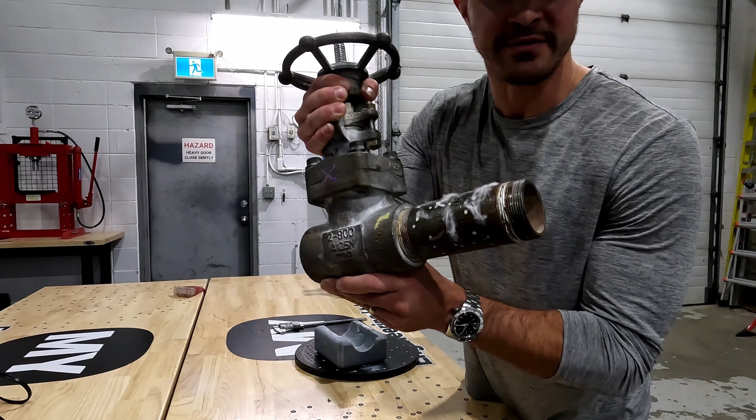So what I've done is, using this valve, I've scanned it in the clean condition, and also scanned it with some insulation residue on it. I'm going to show you how that affects the measurements when we bring it into the computer. You can see on this valve that there's some fuzz left on here, some insulation residue.

Now, when you're measuring by hand using calipers, that might not matter so much, as with the calipers you can compress that insulation down to the bare pipe and it's going to have a minimal impact on your accuracy. But when you scan and we bring it into the computer, we can't really tell the difference between bare pipe and where there might be a little bit of fuzz left over.

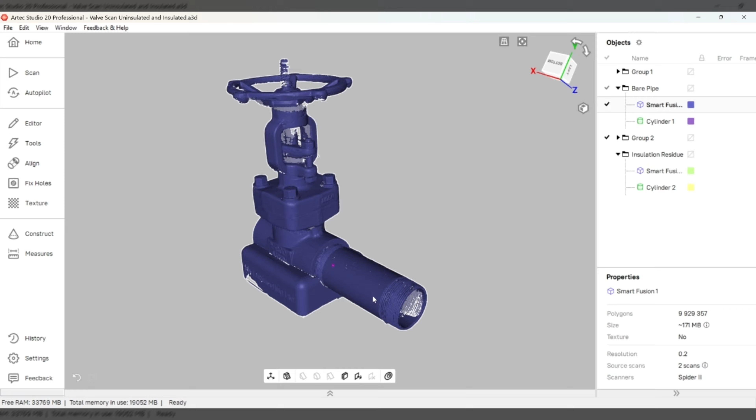So I'm not going to show the scanning, but I am going to show you what this looks like when we bring it into the computer. So here's the valve, the first scan that I took with the pipe being clear. There's some marring on it, but there's no insulation on here.

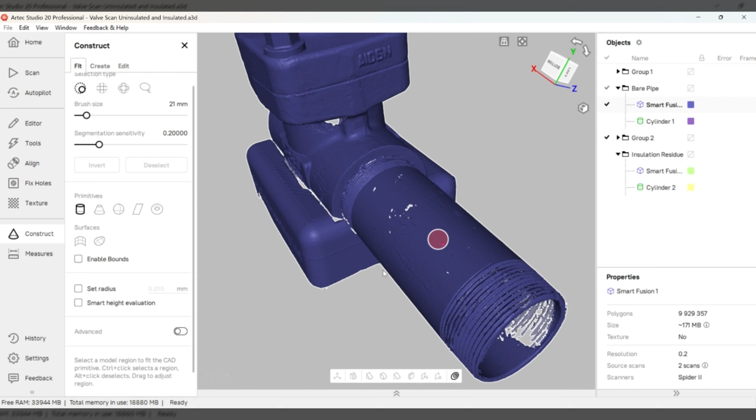So what I'm going to do is fit a cylinder to this. This is a fairly standard process that we use when we're extracting measurements. So I'm going to click a spot here, and what this is doing is finding all of the points that it believes to be a part of this cylinder. So here we go.

This is what it looks like. So it's picked all the triangles on here that it believes are part of the cylinder. It's actually ignored a bunch of the marring, which is nice.

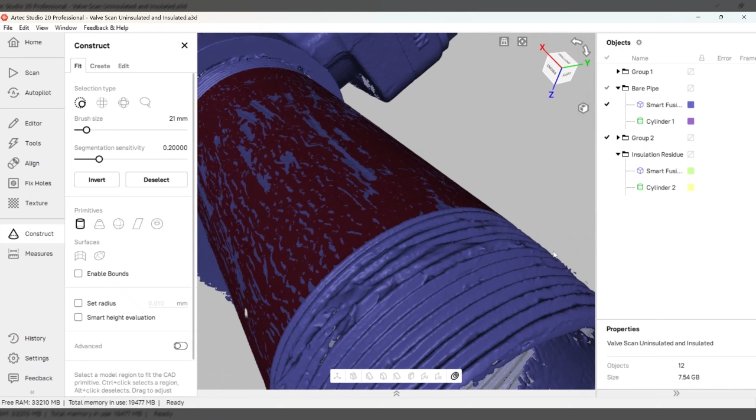So what I do is I inspect this to make sure that this is in fact all the data that I want to use when I am taking my measurements. So I think that looks pretty good. So I'm going to fit a cylinder to this, and then once this cylinder is fit, I'm going to check the measurements of it.

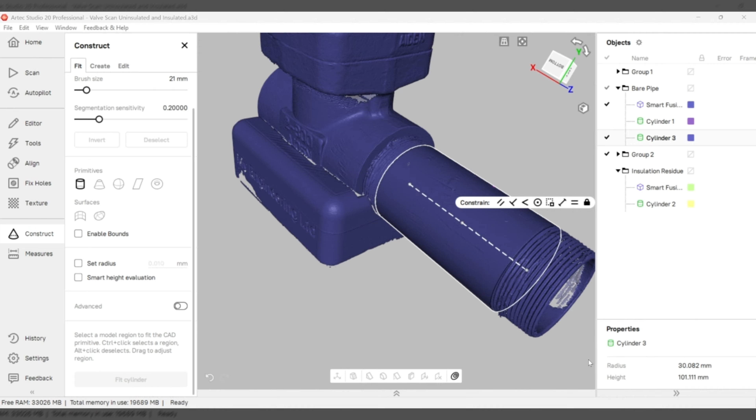Okay, so the cylinder's fit here. If I click on this cylinder, it's going to tell me the dimensions. So I got 30.082 millimeters on radius, so that works out to a diameter of 60.164 millimeters. Okay, that's how that works.

If I want to take a look at the accuracy of that cylinder, I can compare the actual cylinder itself that I created to the pipe to see how round the actual pipe is. In this case, it actually looks pretty good. There is some deviations, but that would probably be fine.

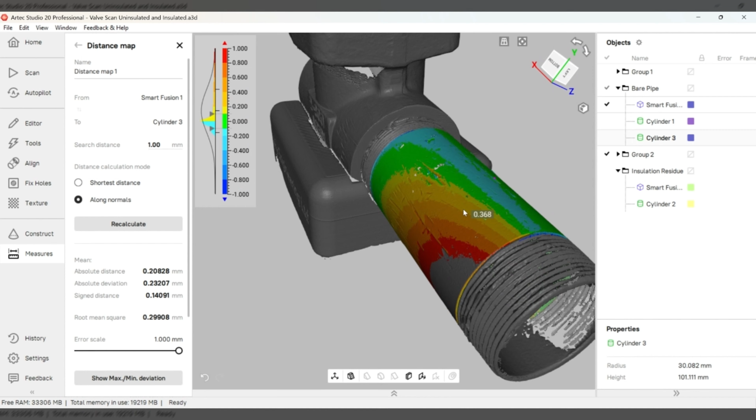If it was really out of round, then we would end up taking a cross section and using an oval or a custom profile. But for the purpose of this video, I'm not going to go too deep into that.

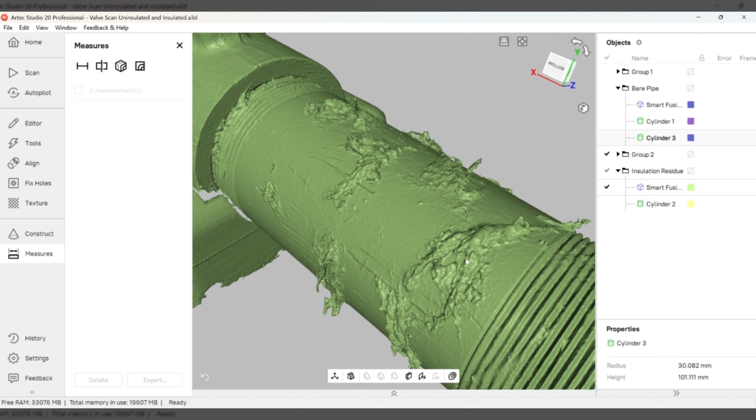So now I'm going to do the same process looking at the pipe with the insulation residue. So here's how the scan looks with the insulation residue. You can see that there's all these gobs of stuff on here. That's how it appears when it's in 3D scan format. So there might actually be some tiny little strings in here that I can't actually see. It just fuses that as a part of the pipe.

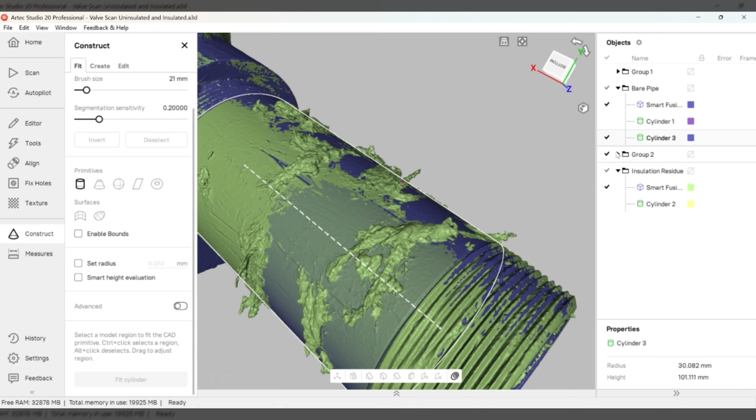So what I'm going to do is do that same thing where I create a cylinder and we'll check the results. I'll click a spot here, and you can see it's pretty intelligent.

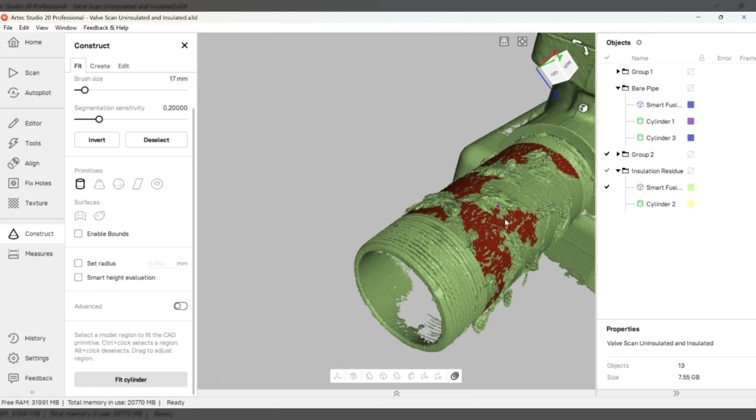It actually scrubbed out a whole bunch of this insulation, but it didn't grab the whole pipe. So I'm going to grab another section in there. That looks pretty good to me too. And then I'll go to the other side, select here. That looks pretty good. It's not really picking up any of that fuzz from what I can see. Maybe grab some in there.

So the more points that we grab in the spot that we're landing, the more accurate it's going to be, because it's going to use all that data to put a best fit cylinder on. So that looks pretty good to me. So I'm going to create a cylinder from that. And it measures 30.296 millimeters radially.

So to create a diameter from that, we've got 30.296 times 2. So 60.592. So here's my measurement with the insulation on, and here's my measurement with the insulation off. So the 60.164 would be the bare pipe, and the 60.592 is the measurement with the insulation.

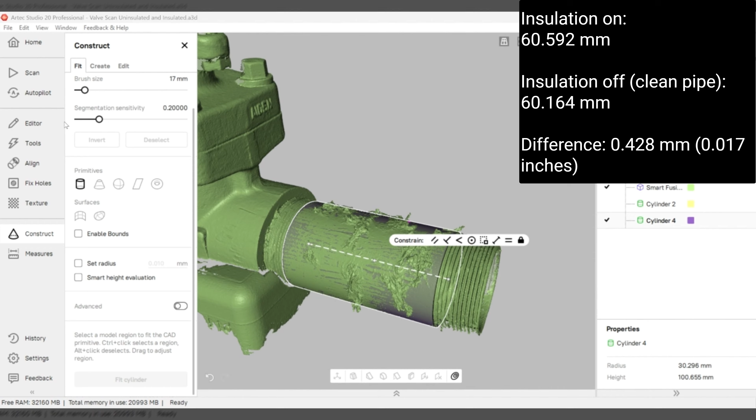So let's take a look at the difference of what that is. So if I subtract one from the other, we had a difference in measurements of 0.428 millimeters. So in inches, that is about 17 thou. So the one pipe measured 17 thou bigger than the other. Now, this is a pretty small pipe, so that might not be a huge issue.

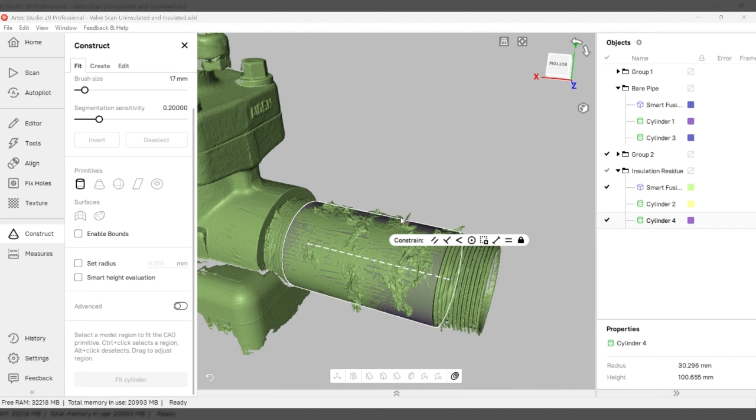Although there are some clients that we work with that like to fit their bores really tight using only 20 thou of diametrical clearance. So if that was the case and they left the insulation on, then it probably would fit loose and that would be an issue. So even though when I was constructing the cylinder, I looked pretty closely and was picking points that I thought were good pipe, there might have just been little traces of insulation left over that caused it to measure big.

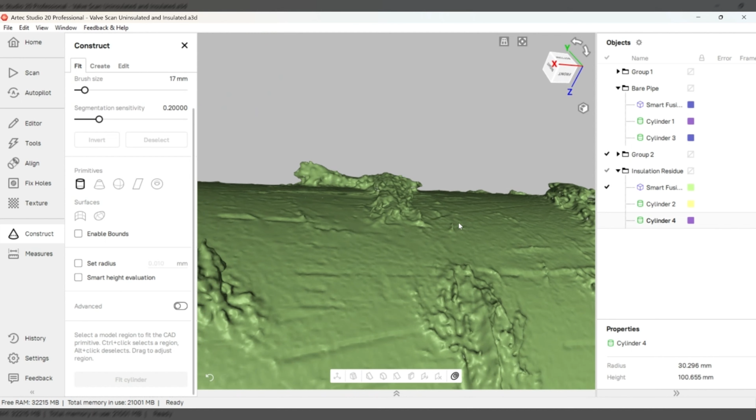So I did what I thought was a pretty good job, but again, there might have been some artifacts in there, which I can't really tell by looking at it on the screen, but there might have been some stuff in there. And actually, I guess there was, because it measured bigger, that ultimately affected the diameter of that pipe.

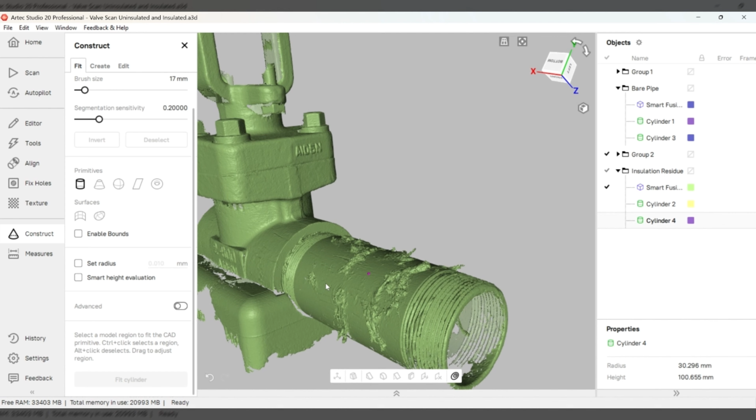So this is the kind of issue that scales when you get into bigger pipe sizes too. So if you've got a 30-inch pipe and you've got a little bit of residue on there, then it's probably going to grow just that much bigger and it could cause things to fit loose. So it is very important that you clean off the pipe that you're scanning, the object that you're scanning, right to bare metal if possible, before you take your scan so that we actually get accurate measurements and we can design the enclosure to fit properly.

So I hope that this helps clarify why it's so important to clean the pipe off when you're using a 3D scanner. 3D scanners do behave differently than calipers and tape measures. When you're using those kind of tools in the field, you can often pick good spots to get your dimensions. But when we're working with a 3D scan, sometimes we can't actually tell what's a really good spot versus a spot that's not so great to extract our measurements, especially when the layer of insulation is really thin, like just a little bit of fuzz on there would be very difficult to tell.

I did scan this using a Space Spider scanner, but that doesn't really matter. This is scanner agnostic. So no matter what equipment you're using, you're going to want to make sure that the object is fully cleaned off prior to taking your scan so that you get an enclosure that fits perfect.